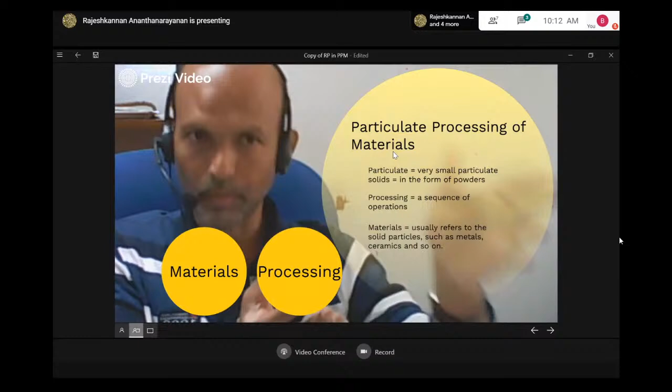Now, before we get deeper into it, we will see what are the materials classifications. In your textbook, mostly in BE first year or second year, we will be studying about the materials classifications. In a textbook context, usually the fundamental classification is this: metals and alloys, ceramics, glasses, polymers, semiconductors, composite materials, and so on. Nothing wrong.

This is really fundamental and it is important. But as you move a little more advanced, this fundamental classification is no longer going to help you. You know why? Because it all depends on the functional or application basis. Those classifications are like aerospace, biomedical, and so on. Why? Because if you take aerospace applications, it's not that one material is going to satisfy the entire purpose. For example, metals alone are not going to satisfy it. It's a combination of many - metals are there, ceramics are there, polymers are there, semiconductors are there, composite materials are there - almost everything comes into play, playing an important role in that particular function.

So that's the reason, a little advancement to that is functional classification - aerospace, biomedical, electronics materials, and so on. Each field has got a vast ocean of research going on successfully, and now this is application based. The next one, a little more advanced, is technology based, like nanotechnology or functionally graded materials technology and so on. Now, looking at this, one thing we understand is that the development of materials, the research on developing materials, is a never-ending process. As long as the world exists, as long as we human beings exist, this is going to continue. It's one of the evergreen fields, I would say.

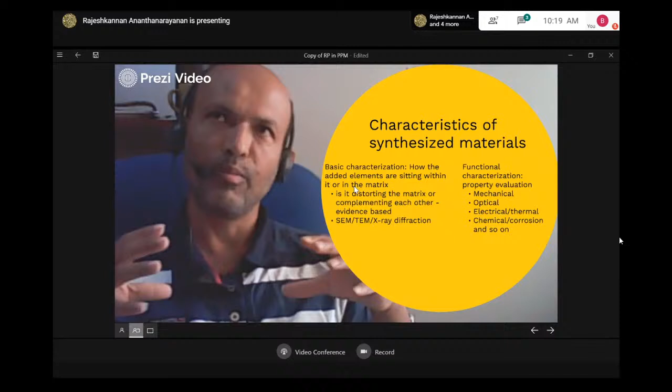Let me give one good example so you would appreciate that. In our basic course, we must have studied about several bondings, and one example is covalent bonding or ionic bonding, in which sodium and chlorine together form sodium chloride. Sodium alone as a material is highly reactive, whereas chlorine alone is highly poisonous. But when you put both NaCl together, it gives an altogether different property. As a separate material, each possesses a different property, but put together it gives a different property. NaCl is nothing but table salt, which we use for our day-to-day cooking and consumption. But if you consume Na alone or chlorine alone, for sure we are dead.

So this is important, how when you put materials together, how it contributes or how it settles together. This property is really important. We can reveal those properties using techniques called scanning electron microscope, transmission electron microscope, SEM, TEM, X-ray diffraction. So many techniques are there, which are really important to establish its basic characterization.

So what I'm trying to say here is, if you process the material, fundamentally you have to make sure whether the developed material really possesses those properties or not, which all depends on its structure. Let me give you one flow chart. The property of a material, remember, the property of a material depends on the structure of the material.

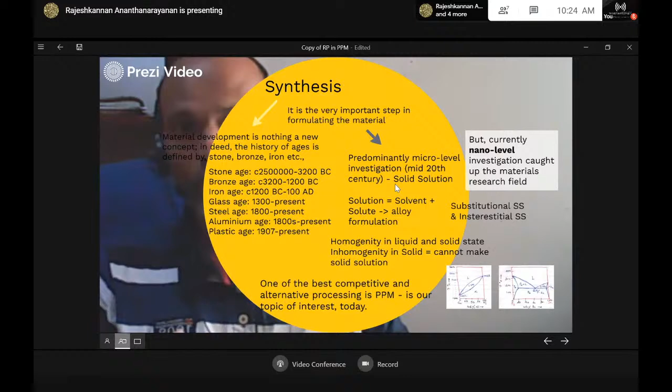I had already explained what the casting process is. In other words, we call that a solid solution. You need this fundamental understanding in order to understand the particulate processing of materials. I'll tell you a very simple way: solution is equal to solvent plus solute.

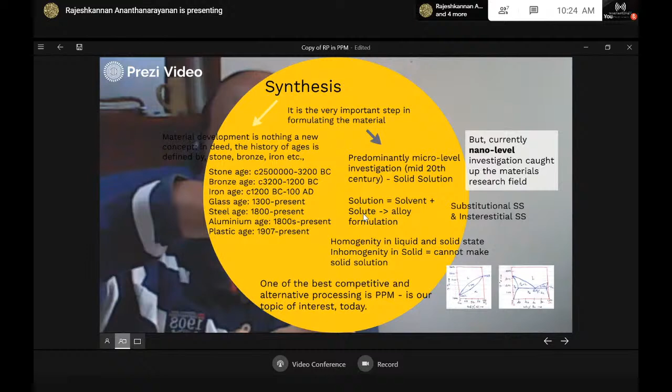What does it mean? Solvent is the parent material. Solute is the second phase material. I'll put it another way: water and salt. Water is the solvent and salt is the solute. You put them together, and this is called a solution.

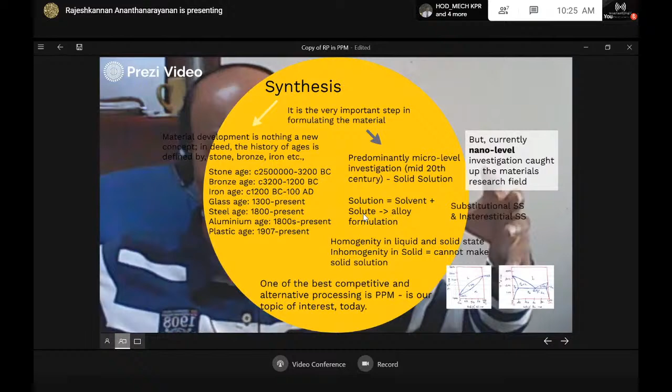Usually our brain thinks solution means it is in liquid form. I hope most of you agree, because this is how my students have agreed. So solution means we are bringing it to the liquid state. So the parent material and the alloying material are all in molten state, right? In the molten state, liquid state, all this material homogeneously dissolves with one another, homogeneously mixed with one another.

But when you solidify it, depending on the nature of individual materials, either it is completely soluble even in the solid state, or it is partly soluble, or completely insoluble in the solid state. If it is completely insoluble or partly insoluble, that means your objective of making an alloy is impossible. You cannot make it at all.

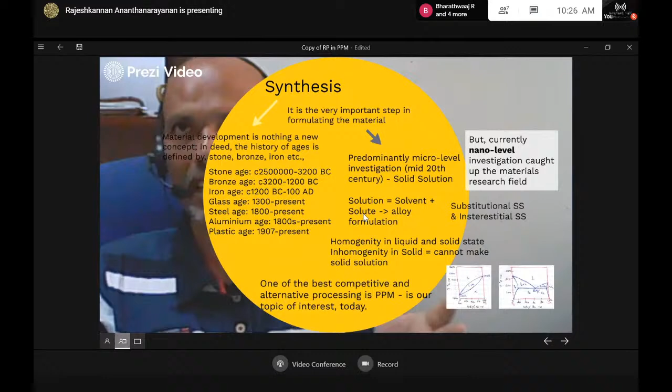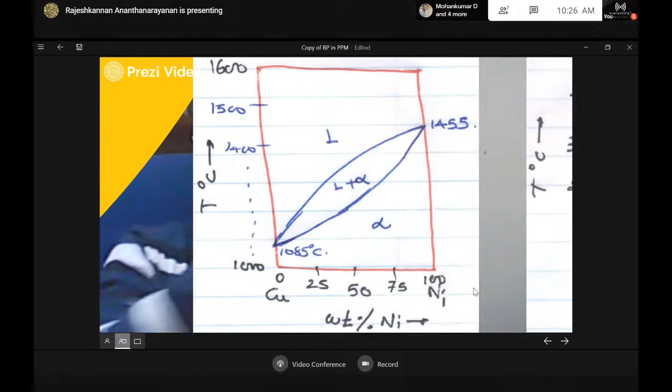You must have studied this in your basic course, something called this diagram. This diagram represents a binary isomorphous phase diagram. You know what that means? Binary means two materials, a parent material and a solute material.

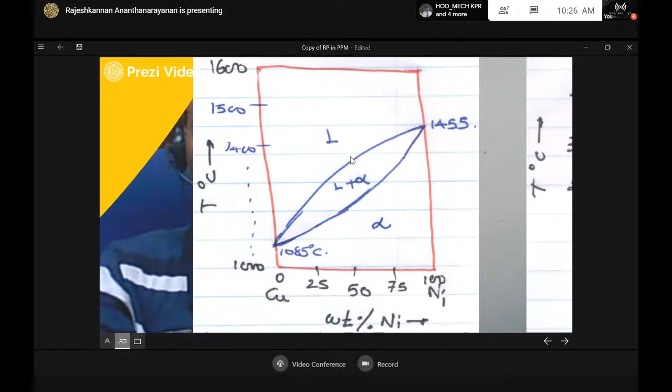So how are these two materials completely soluble in the liquid state? Here it's completely soluble in the liquid state and completely soluble in the solid state. So this is called a binary phase diagram. In between is liquid plus solid, and here it is.

This one is called partly insoluble or completely insoluble, so we call it a eutectic reaction. This is liquid and this is the liquidus curve, and this is lead and tin. This side is temperature in degrees Celsius, and this side is tin at 0%, 20, 40, 60, 80, and 100%.

Meaning thereby, tin here is 100%, and here it is 0%. On the other hand, Pb is 100%, and accordingly it reduces. So at any given point, it should add up to 100%. All right, so this is nothing but the phase diagram.

I hope most of you would know this. Since I'm not able to see your face, I do not know whether you would already know or not. That's why I'm explaining the x and y axis as well. So what does this mean?

At this particular location, in the liquid state, both Pb and Sn are completely soluble, homogeneous. But at this location, Pb separately solidifies and tin separately solidifies. So if that is the case, you cannot add Pb and Sn together and make it an alloy. This is one of the biggest disadvantages of your casting process.

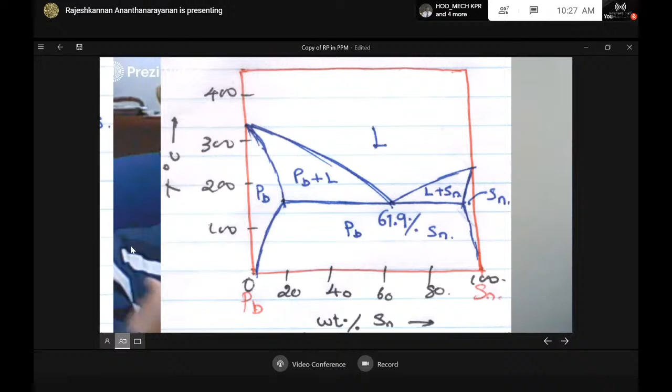So this is what I was explaining about. This is one of the greatest disadvantages of the casting process. Therefore, you need some alternative process. One of the best competitive alternatives is PPM. One of the best competitive and alternative processing methods is PPM, particulate processing of materials, which is our topic of study today.

So you need this basic understanding. Now, what I have given here is almost all the time, right from the Bronze Age, Iron Age, and so on, up to the mid of the 20th century, exactly what I'm saying is World War Two. That's the peak of developing so many materials.

You must be knowing, maybe some of your friends or teachers must have shared with you, that's the peak of the time industrial revolutions happened and much development happened there. In fact, you would wonder that a massive amount of steels were developed during that time. You would know that most of the steels in the European side were numbered as EN01 or EN2, EN3, EN4 to designate the steel. You know what EN itself means? Emergency number.

So it's sarcastically told by our research colleagues that at that time they did not even have time to name the particular steel, so they gave it as emergency number EN1, EN2, and EN3. So what I'm trying to say is during all that period of time, up to the 20th century, material development mostly went up to the micro level of research investigation. But after some time the research investigation reached a saturation state and we had to go a little deeper, and that's the nano level investigation.

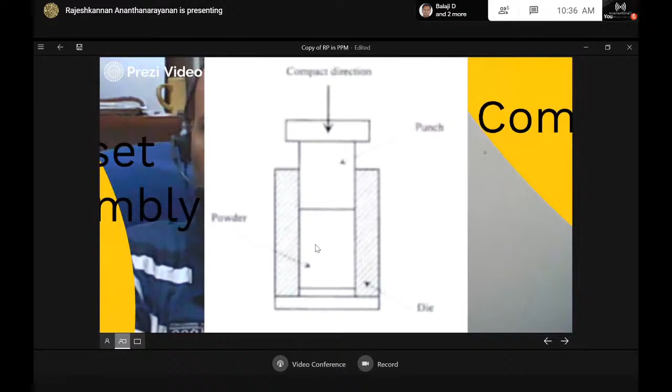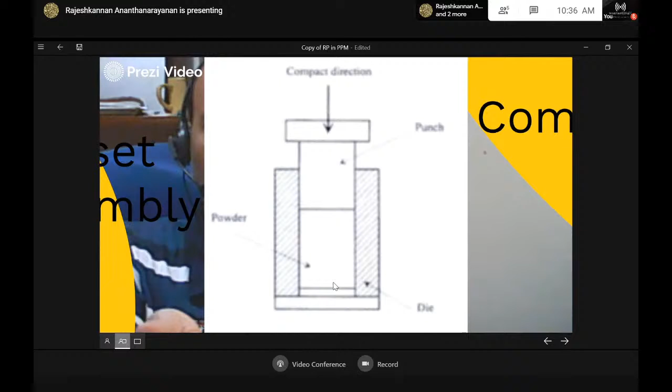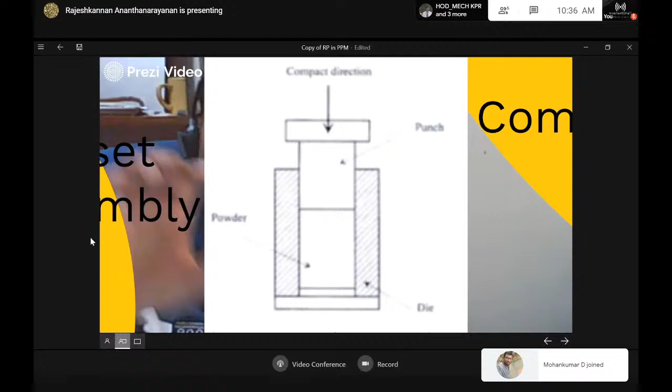One example you can take here, we are going to produce a cylindrical compact. So this is your die, and this is the bottom insert, and this is your punch. You pour your metal powders here, and then you do a compaction process, and through the compaction process you are producing the compact. In other words, this is the part that you wanted to produce, and we have produced it. So any shape and size that you want to produce, it is important that you have to make the die.

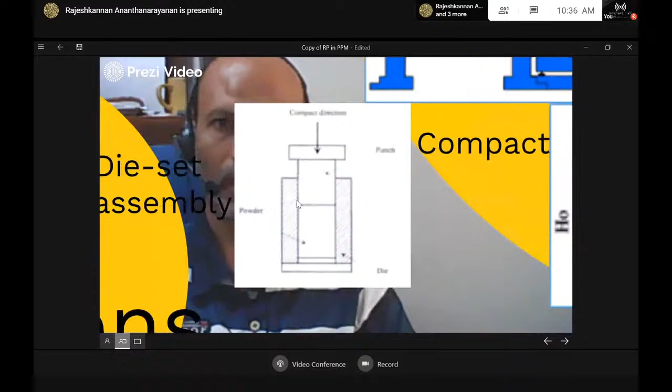So now this die is kept here, and then the required pressure is applied. When you apply it and then eject it, you get this part. Because it's a cylindrical die, obviously you'll get a cylindrical part with its initial height and initial diameter, and its cross section looks like this.

So now after compaction, what exactly does compaction mean? These solid particles are forcefully joined together with high pressure, so that each particle with its neighbor particles, a cold welding might have happened, but still metallurgical bond is not happening. Only a forceful attachment is given, but the metallurgical bond, in other words releasing the mechanical stress, nothing is there.

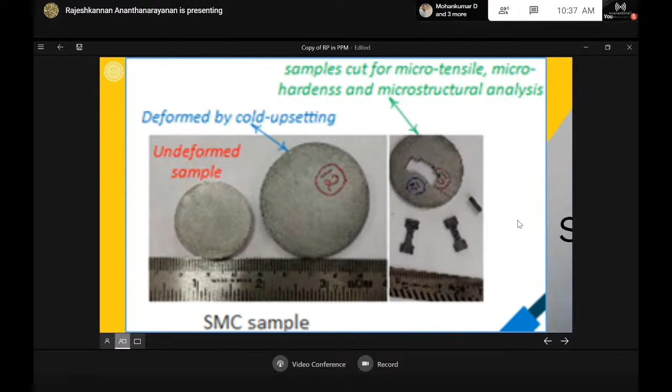So for that matter, we are doing a sintering process. Here it is. In sintering, we are providing the metallurgical bond as well as easing the mechanical stress that we developed in the compaction process. After that, we produce the part, and this is one example from our research laboratory where we made the part, and out of the part we made some tensile specimens to undergo functional property examination. So this is the fundamental operations.

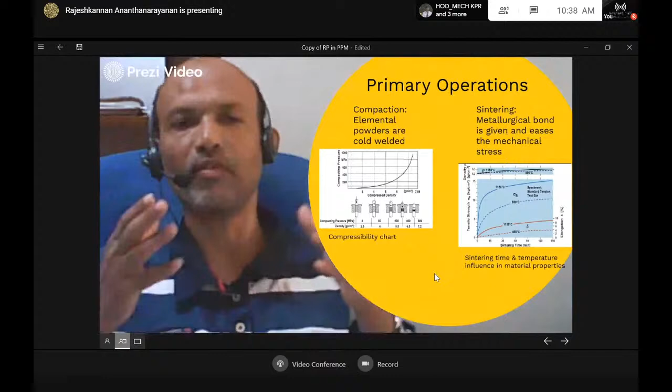Now two things are necessary to understand. One is the primary operations of powder metallurgy, the other is secondary operations of powder metallurgy. In the primary operations, two important things: one is compaction, the other is sintering.

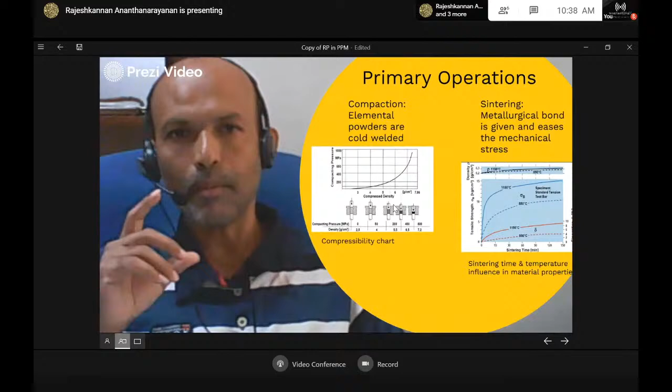Now in the compaction, what is really important? In order to produce the part of required density, it is important to know how much pressure to be applied. Like I was explaining in the previous slide, you bring the powder and the compaction die and you have to apply the pressure, but we do not know how much pressure to apply. So in the compaction process, we have to conduct a compressibility study to know how much pressure to be applied in order to produce the part. That's exactly what this curve is all about.

You see, for various densities, assume that the iron ideal density is 7.86, the theoretical density. Depending on the compaction pressure, the density increases. So if I want to produce like 6 gram per centimeter cube, then you have to apply this particular pressure. So this study we have to make so that for that particular alloy or combination, you know how much pressure to be applied.

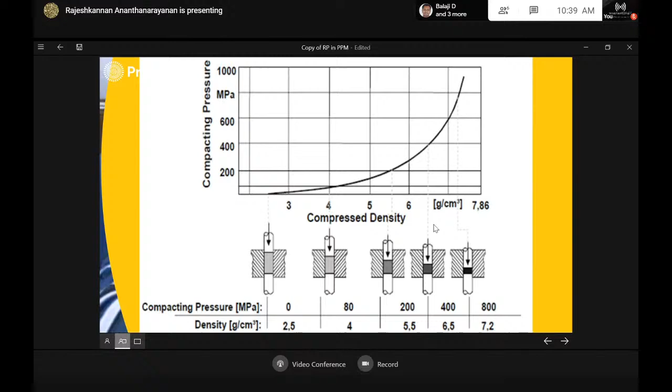Now the next thing is sintering, which I said produces the metallurgical bond in the part. In sintering, two important things matter: the time and temperature. Usually, my friends, the temperature is given as 0.7 to 0.9 times of the parent material's melting point.

What does that mean? If you want to produce a steel of Fe with 1% silicon, 0.8% carbon, 1% manganese, and so on, there are plenty of alloy materials added. Forget about all the added material. The parent material is Fe, whose melting point is, let us say, 1450 degrees Celsius.

From the 1450 degrees Celsius, you choose 0.7 to 0.9 times of that particular temperature to do the sintering process. Let us say here 850 degrees Celsius and 1150 degrees Celsius, two different values. And then the timing, let me take 15 minutes to maximum 120 or 150 minutes. How this time and temperature influences the percentage elongation, tensile strength, or density, the mechanical and physical properties.

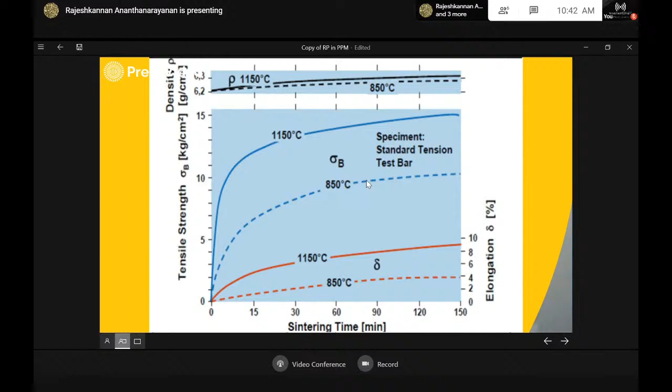Energy wastage, on the other hand, implicates ecological disaster or damage as well, so it's important. Similarly, when you increase the temperature, there is a phenomenal increase in percentage elongation as well as tensile strength. So for our research, being a researcher, we have to conduct several trials with sintering time and sintering temperature to choose the optimum time and temperature to give it to the industry people to move on. So this is all about primary operations.

The next is secondary operations. Here I wanted to tell you one thing: in real time, the primary operations itself is enough to produce the full part. Unless and otherwise something specific is needed, then you need to go for secondary operations. Otherwise, your entire job is over from the primary operations itself. Now, why would you go for secondary operations?

Something like to increase density, improve further accuracy, or accomplish some other additional shaping, then you go for it. For example, repressing - pressing the sintered part in a closed die to increase the density or improve properties - or sizing, coining, or machining. In powder metallurgy, you cannot provide threads or side holes, which you have to make separately. Primary operations will be sufficient to produce a finished part in majority of cases. However, under some specific requirement, secondary operations are necessary.

Yet PM is not as simple as that - it has complications. We'll see the complications now. Why would we go to challenges? I had already explained the topic of research pathway, and I had also asked whether it possesses enough complexity in formulating the research problem. Here's the answer. Whatever we have seen before are all the basics, as well as the important things to keep in mind when developing the material to establish its basic characteristics.

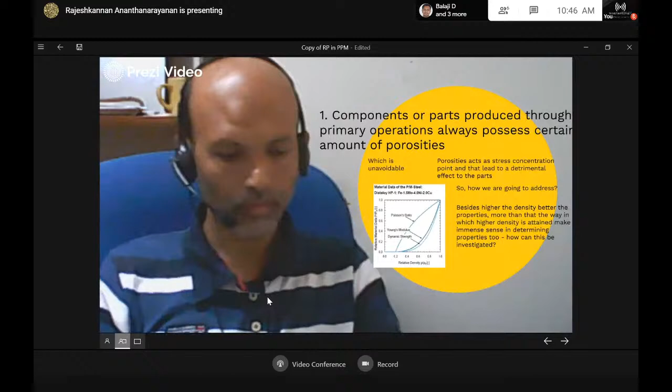We'll see one by one now. This means challenge number one. There are plenty of challenges, or plenty of opportunities, to do research, but these are all unique based on what we have studied so far. Number one, you see this?

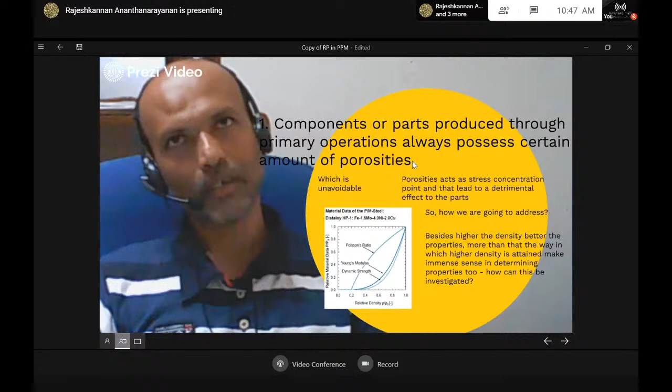Components or parts produced through primary operations always possess a certain amount of porosity. That means it's never possible to achieve 100% density. Through primary operations of powder metallurgy, it is impossible to produce 100% density. There are always some amount of porosities existing.

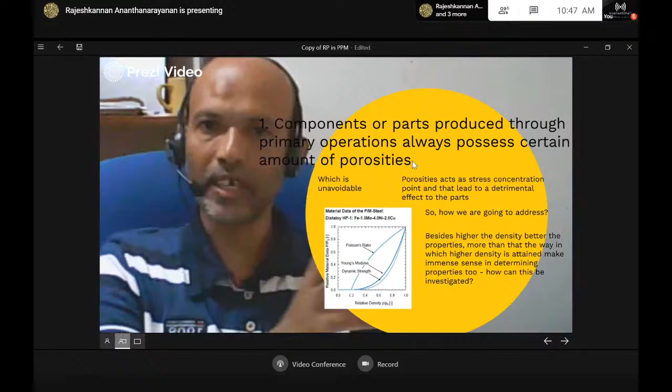If you take it to structural or mechanical applications, these porosities act as stress concentration points. As a result of the stress concentration, the material exhibits premature failure - it fails so soon. So then how are we going to address this? Obviously a question arises. This is exactly a research problem for your chosen material combinations.

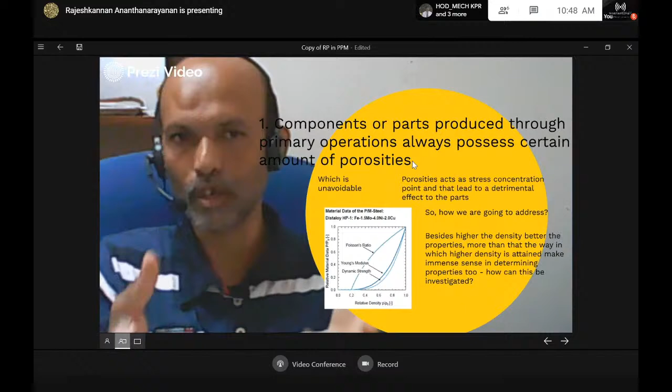Besides, higher the density, better the properties. So you need to produce with high density, or 100% density, in order to get better properties. But what is more important is merely achieving 100% density does not satisfy the property requirement. The mode, or the way in which you achieve the higher density, makes an immense difference.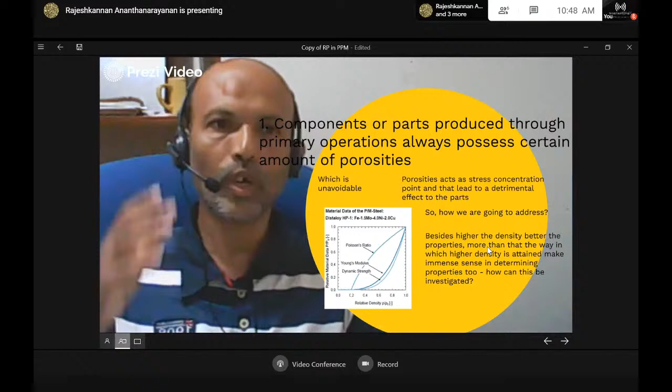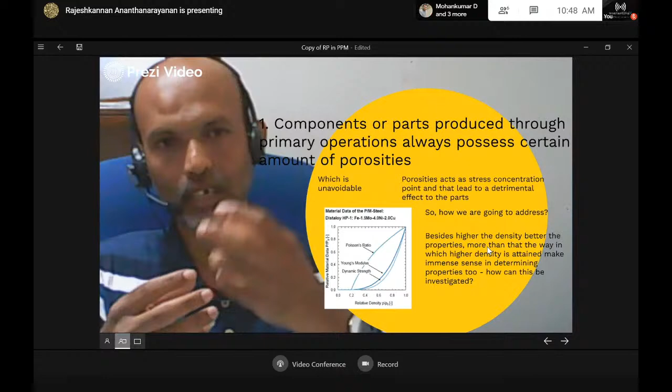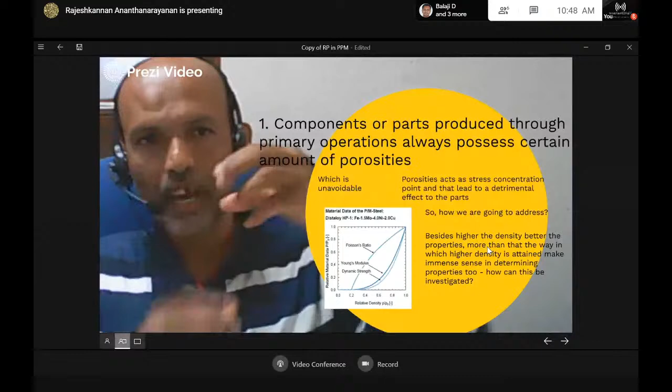For example, I'll give you an example of how to achieve 100% density. One way is impregnation technique - if there is a porosity, by injecting foreign materials or alloying materials, we can achieve 100% density. Or infiltration technique - you heat the material with the porosity, then dip it into another molten material, which gets entrapped inside the porosity, achieving 100% density.

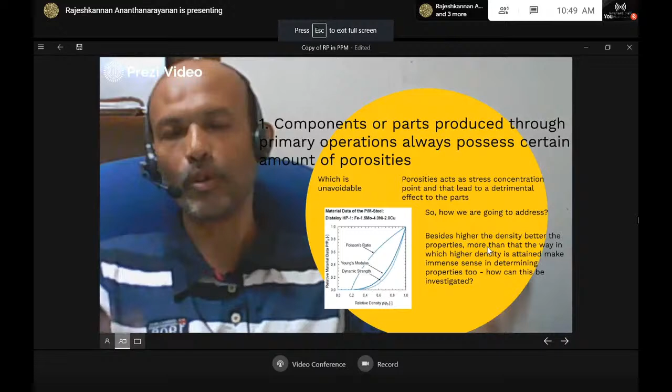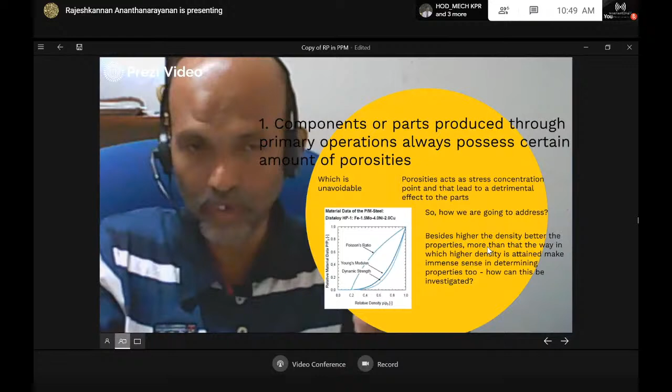Similarly, there's powder forging, through forging technique, through extrusion, through rolling, or other processes. Now through logical sense, comparing infiltration technique to powder forging, which one would give you higher mechanical properties? Obviously powder forging, and not infiltration. So therefore, the mode by which you are achieving density is also important to establish.

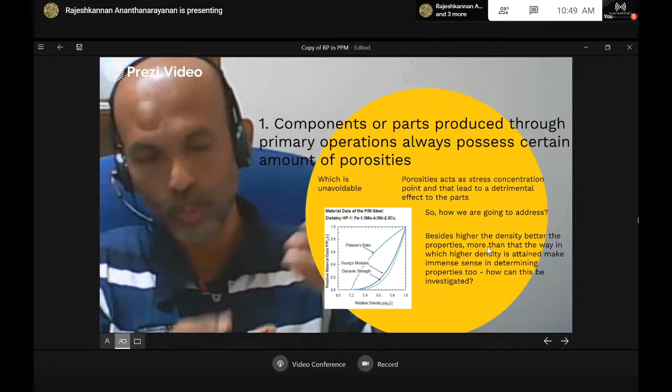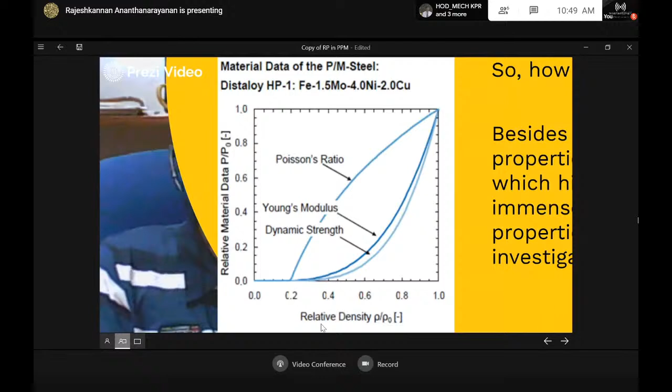Here I have shown one example of how density is influencing the mechanical properties. I have mentioned relative density, rho by rho naught. I need to explain this so you understand the graph. Rho naught means it is the theoretical density.

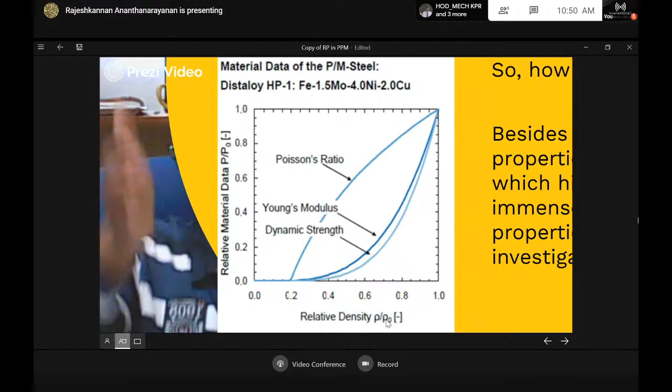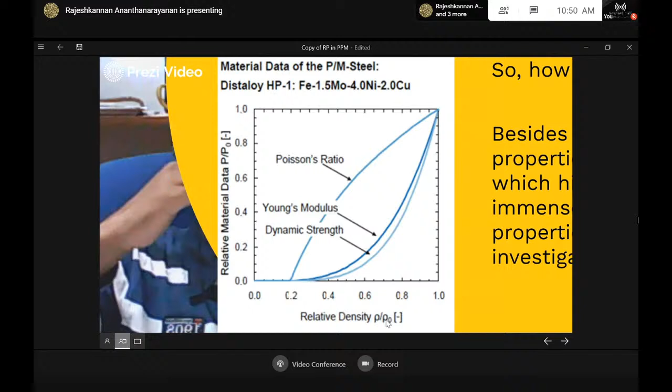If you take iron density, if you Google it, it says 7.876. In an ideal case, iron should consist of 7.876, meaning if you take one centimeter cube of volume, it should possess this much mass. So that mass divided by volume is nothing but the density - that's the theoretical density, 7.876.

Now this rho is the one in the numerator, through primary operations like powder metallurgy - the compaction process and sintering process. Through compaction and sintering, you are making a part and you measure the density, which would be around 7 or 7.2 or 7.4, whatsoever it is. Now that 7 divided by the ideal density, 7.876, gives you the relative density. I hope you understand now.

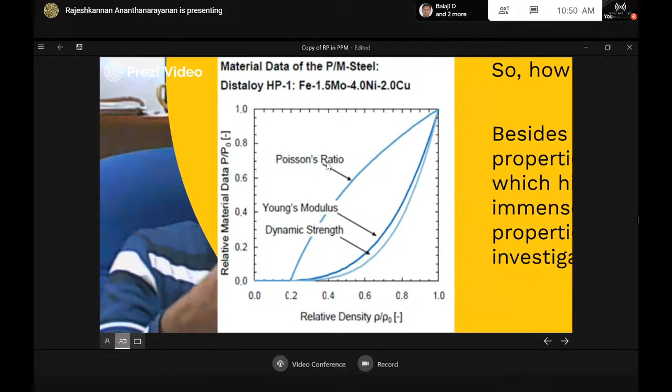This is relative density. Now as you improve the relative density, you can see how strength, Young's modulus, and the Poisson's ratio are improving. So qualitatively, my friends, higher the density, better the mechanical properties. So our ultimate objective is to eliminate the porosity or improve the density.

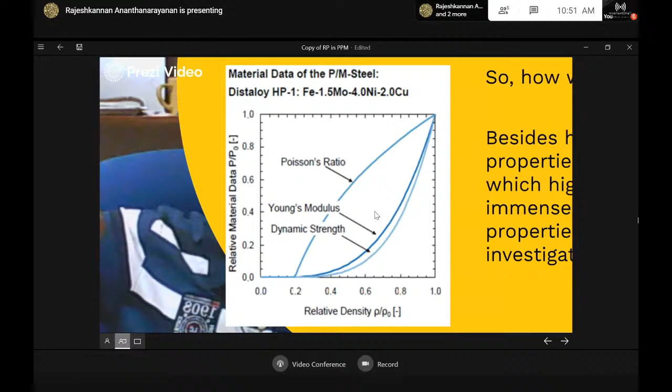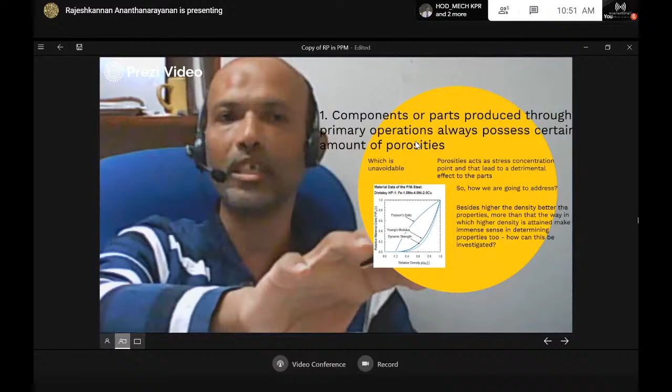So this is one of the research problems. This is not only for a particular material. Any material that you develop through powder metallurgy process, it is important to establish the densification characteristics, because that decides the mechanical properties. Keep this in your mind. This is one of it.

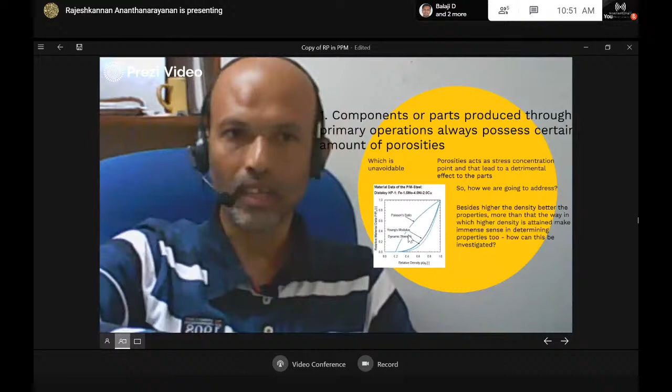Next, challenge number 2. Complex geometries are not easy to produce through PM. Let me explain what this means. While I was explaining about primary operations, I had given you an example of a die set assembly where you can produce a cylindrical part. Okay, it's very simple.

Now think about automobile parts that you wanted to produce. There are thousands of parts, and none of them are as simple as a cylinder. There are several complex geometries. If you want to produce such an industrial part, the first challenge is the die design itself is complicated.

You have to design a die because the die decides the shape and size of your final part. Now suppose even if you designed the die - that itself is complex, but you designed it. The next complication is you have to pour the powders into that designed cavity. When you pour the powder, if it possesses complex geometries, the powder particles don't possess the flowability property, which means the fluidity property.

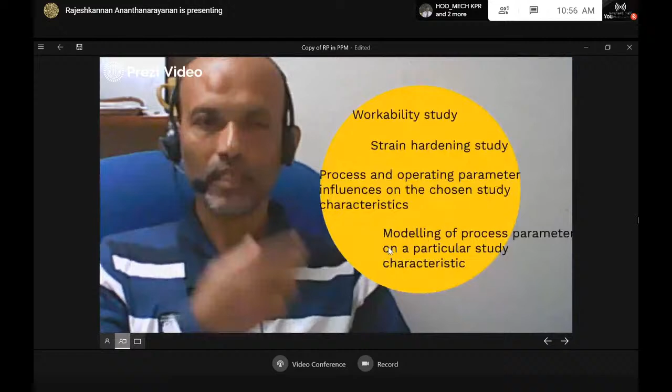So these are all the complications involved as you move towards producing a complex geometry. So this is the second thing. And the last one, in a general sense, remember, any material you develop, there are two things that are really important.

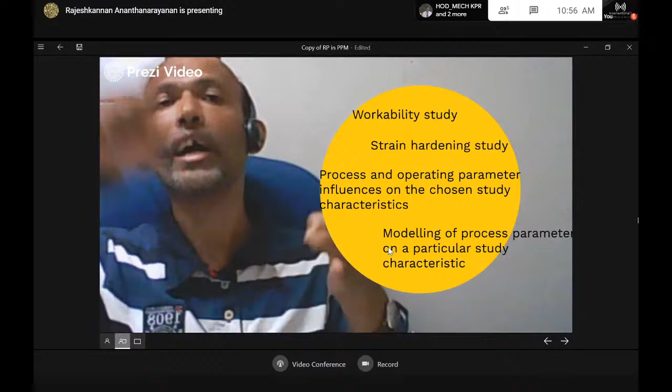Number one is manufacturability. You should be able to produce the part through an existing manufacturing process. If you make a part, the workability characteristics should be revealed. It's very important in any material development: how are we able to produce it, will you be able to produce it or not. That's called workability study.

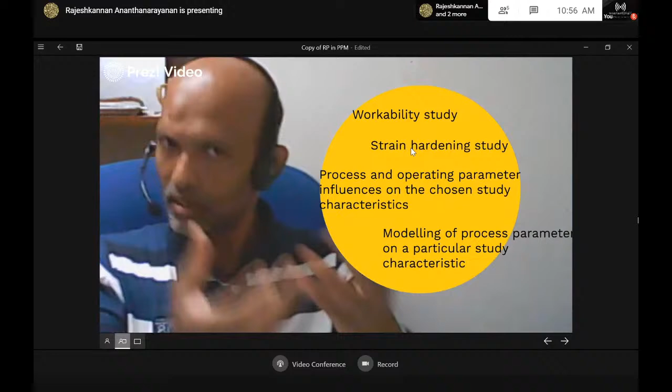A strain hardening aspect I just added. There are plenty I can add, but one of it I added. Suppose if you do your mechanical process through cold forming, or even hot forming, it undergoes strain hardening. So how the strain hardening is influencing the material, which we can reveal.

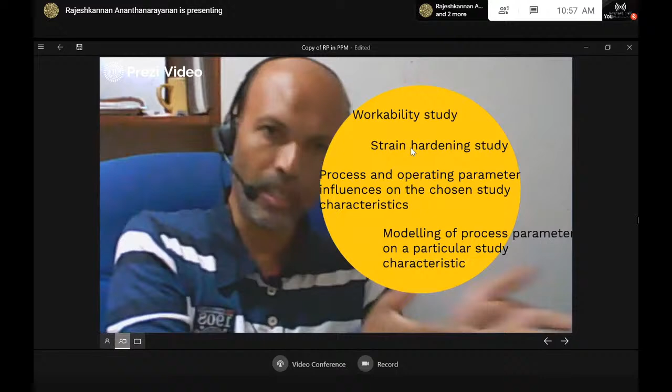Apart from workability and strain hardening, in each process, remember, there are several operating parameters involved, and it influences the chosen study, say workability study and strain hardening study. You can establish those characteristics as well.

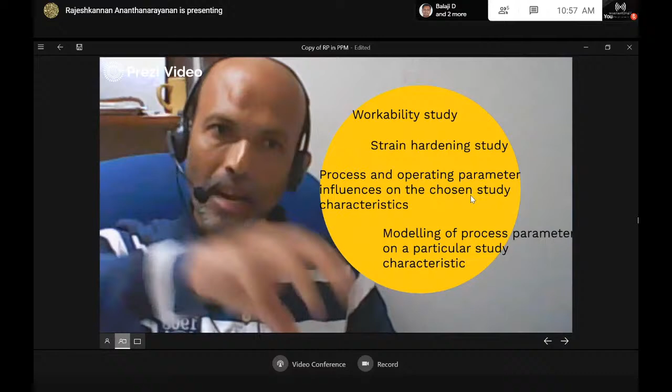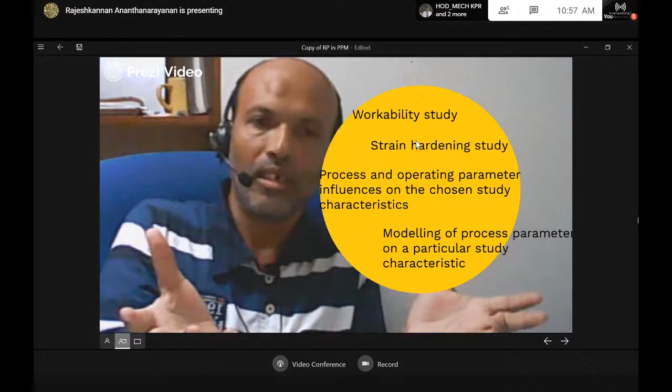And finally, since a large number of parameters are involved in this study, it is also important to model the process parameters. You know why? Every time you don't want to invest your energy, material, time and cost to make the part and then establish the characteristics or material properties. Once you model it, the mathematical model will predict for you instead of doing experimental work. So this is also really important.

This is a place where you can explore a lot of research work.

All right friends, we almost come to a conclusion. So PPM is all about this. The last one is sustainability.

Will this research field be survivable or sustainable? Okay, the last thing, but really important thing. This is not only applicable to PPM, it is also applicable to any research field or any field for that matter. There's one fundamental question you can ask: is this research sustainable in the market? The answer is, does this process meet the sustainability criteria? Right now you need to know what the sustainability criteria is. Sustainability means what?

My friends, I'm not sure if in our BE curriculum we are giving importance to this sustainability or not, but in the real time scenario, sustainability has really captured the entire research market as well as the industry market and so on, especially in the 21st century. There was talk about sustainability quite some time back, maybe two or three decades, but it has really come into the picture these days, in the 21st century.